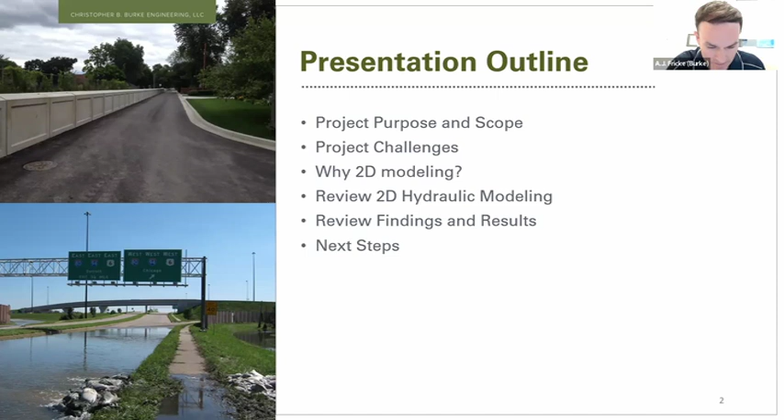So the purpose of our project is to estimate the water surface elevations along Little Calumet River during various flood events using updated data and two-dimensional or 2D modeling. We're going to look at a range of different events, see what water surface elevations those produce, and then evaluate the levee system freeboard or height, comparing those water surface elevations to the top or crest of the levee to make sure that those flood events are contained within the levee.

Our scope of work includes several items, but three main things here that I want to point out. The first was collecting and processing survey data for 30 plus miles of levee. That is done. We previously presented a presentation on that. So we have the levee crest elevations throughout the system. We also did some supplemental surveying to support our hydraulic analysis as well.

We are in the process of wrapping up our detailed 2D model of Little Calumet River. That's really the heart of what we're doing. And then again, performing those freeboard evaluations to compare the water surface elevations to the levee crest elevations.

So why is this important? I think Chairman Baker said it best in the beginning, right? This is a $275 million man-made flood control project. We want to make sure that the events of September 2008 don't happen again. So we know that the levee system protects many assets in the community along the river. So we want to identify any potential problems that may be corrected based on the data that we find out.

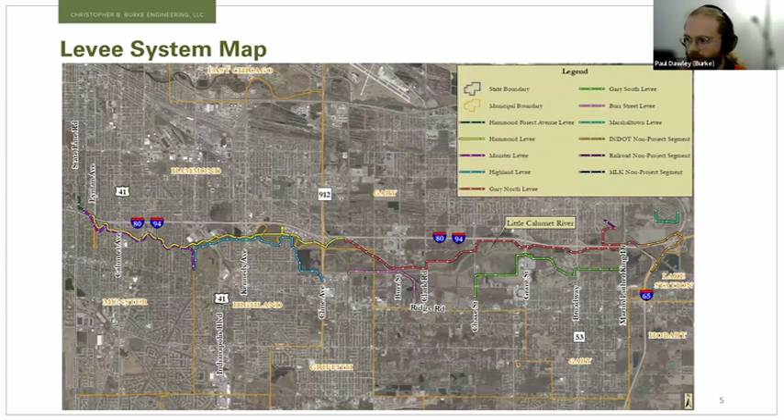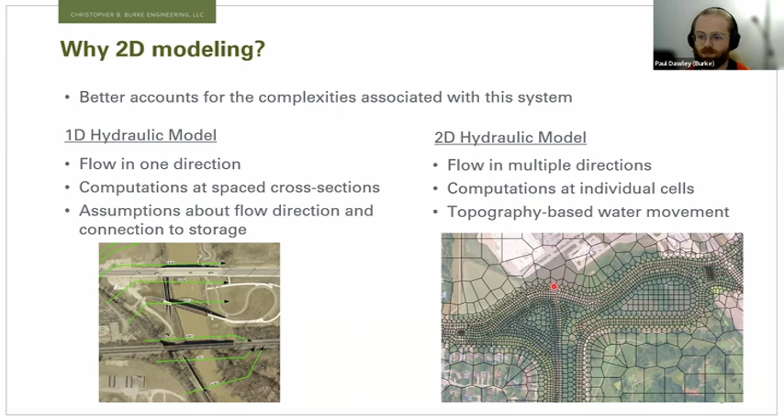Coming from Hart into Little Calumet.

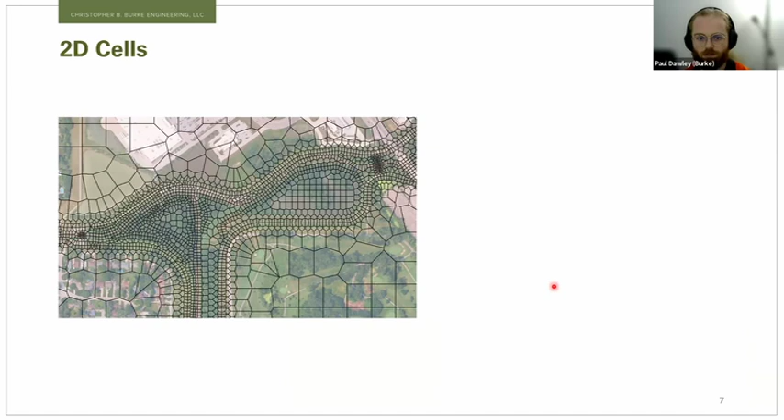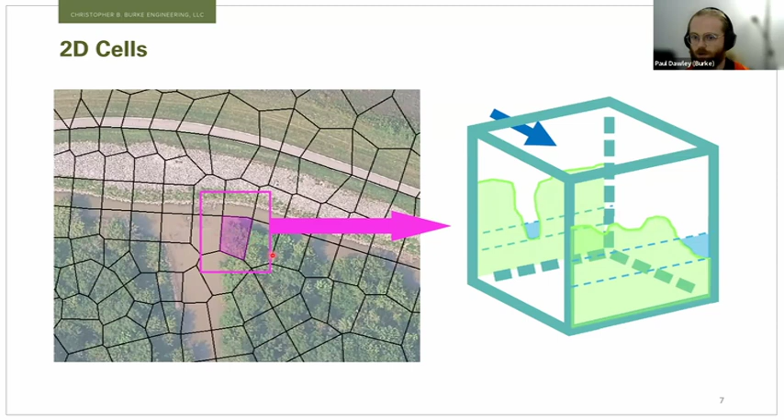So to go a little bit more into how the two-dimensional cells work for these computations, we'll just zoom in on this area here. I have a cell highlighted in pink. Basically, the cell is like a cube, if you will, with each of the edges showing the cross-sectional terrain based on the topography. And then, based on that, it creates a volume elevation relationship. So if there's a certain volume of water within the cell, then it will show a certain water surface elevation, again, based on the underlying topography.

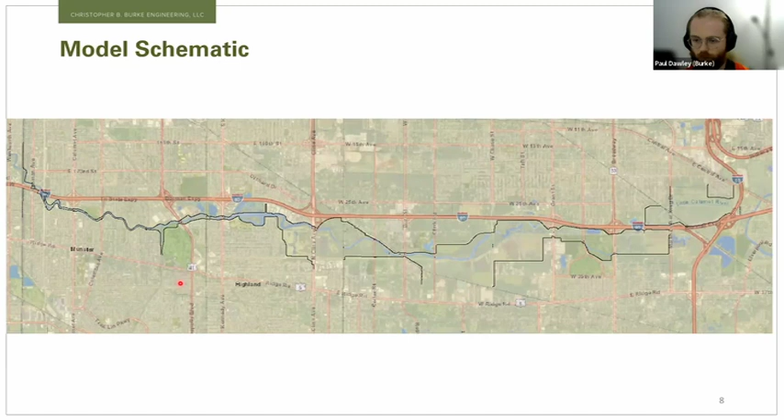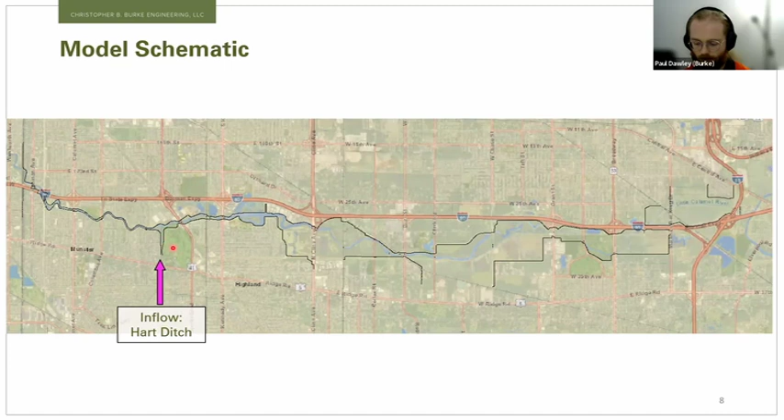So just to walk through a little bit of what AJ was describing as far as how this system works, especially as it relates to how we modeled it. Here we have the primary inflow to the Little Calumet River, which comes from Hart Ditch. It flows north until it reaches the confluence with the Little Calumet River here, which then splits the flow into an east and west reach. In our model, the west reach flows to the Illinois state line over to the west.

And to the east, it flows down to the confluence with Deep River, where we included both the inflow and outflow from a portion of Deep River here in order to account for and capture the backwater effects that it has on the Little Calumet River, which can affect the water surface elevations along the Little Cal.

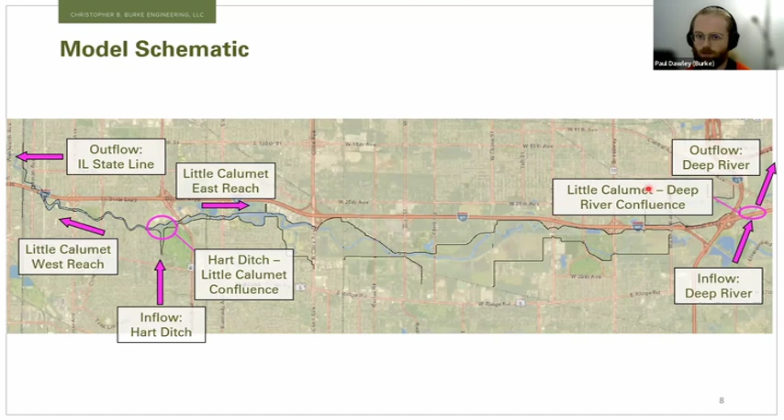So here I'm going to show a graphic animation of the 100-year storm event developing in the west and east reaches. I want to call attention to along the east reach here, you'll see some of these storage areas as the 100-year storm develops, filling in and taking some of that water that had been flowing as it gets out of the channel and into the overbanks.

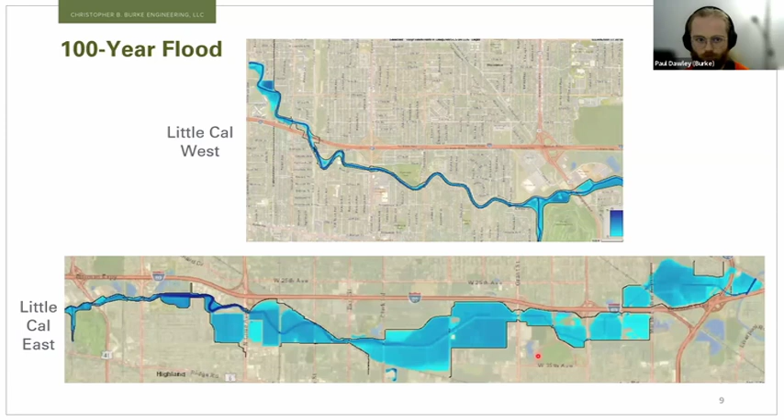This is the confluence with Hart Ditch coming from the south here, and then the split east and west into the Little Cal. So you can see that not only does it split at the channel here, but we also have a little bit of overflow in the overbanks here. I know I've talked to Mr. Repay about this overflow channel to the east here, which you can see a somewhat substantial amount of flow coming through this way.

So I have a quick question, if I may. Yep. Can you determine the volume of water? What percentage of it coming down Hart's Ditch goes west versus going east? Yes, we can. I can talk a little bit about that a bit later. Okay. But that is something that was important for us in calibrating the model. So calibrating to observed data from gauges along Little Cal and Hart, but also comparing to other conditions like FEMA. Thank you.

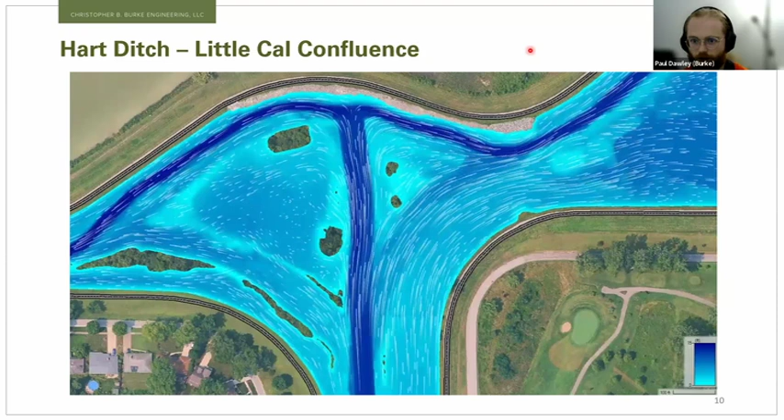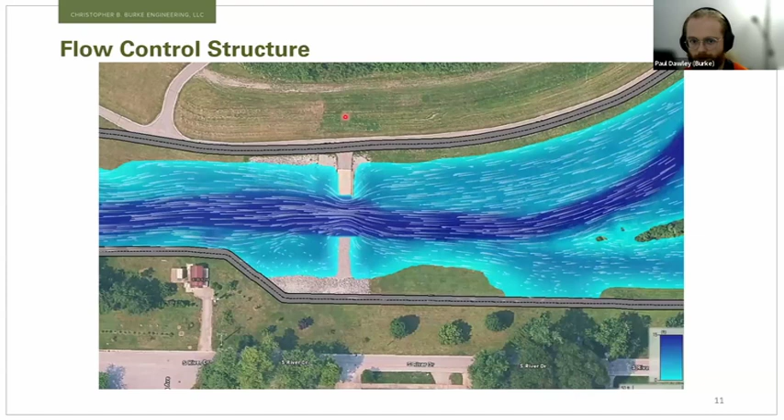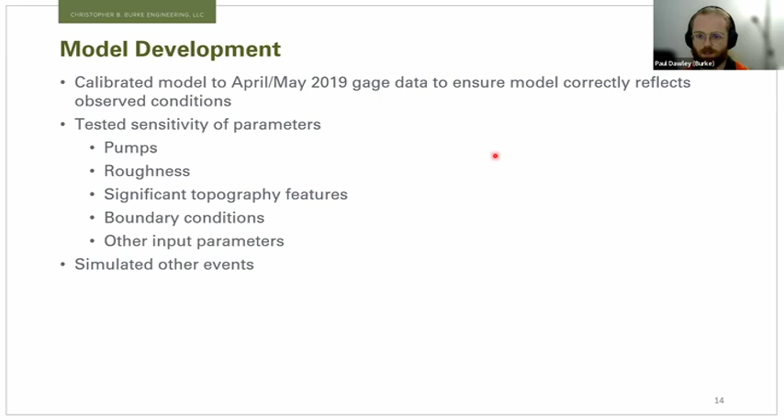We had stage hydrographs set as the boundary conditions based on data from the Corps of Engineers model. And then some other input parameters were tested as well. We also simulated some other events, and we'll continue to expand out which events we've simulated as we move forward. But some of the ones that we have currently done is an analysis of the 100-year storm event, which is what I had showed some of the animations from.

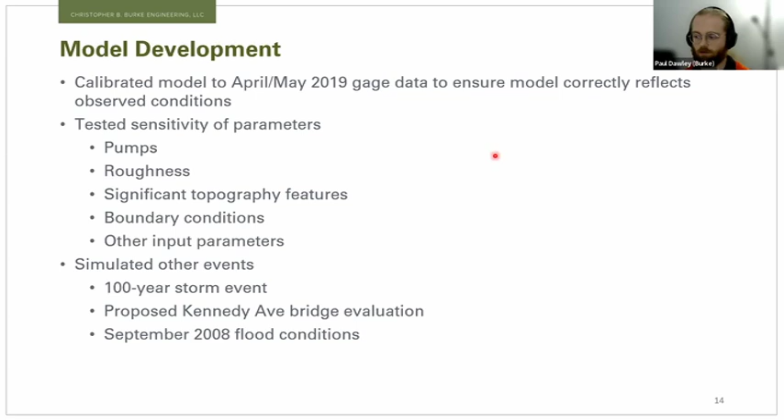The proposed Kennedy Avenue bridge, we've evaluated that at the 100-year storm event as well. And then we also took a look at the September 2008 flood conditions, assuming the current existing levee system topography is in place. And AJ will answer some of those Corps considerations and questions in a second here.

As far as project challenges go, this is a very large and highly complex model. We had about 16 miles of river and 28 miles of levee within the model, as well as 34 bridges and culverts and 82,000 computational cells. So again, think about those cells have a bunch of faces that are basically like cross sections. So compare maybe a few hundred cross sections in a one-dimensional model to 82,000 plus in the two-dimensional model.

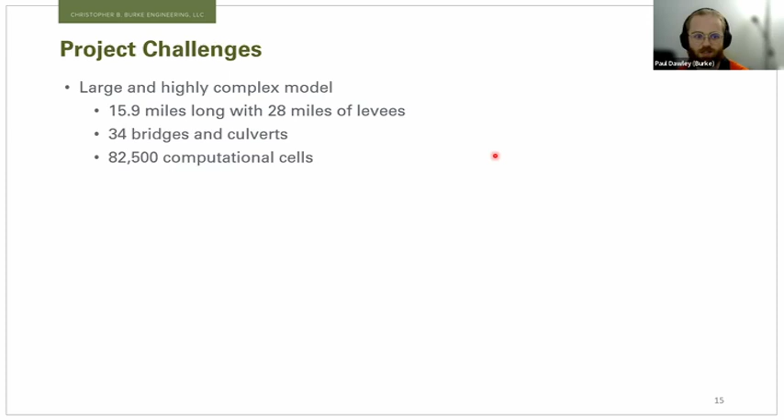We had a lot of data collection that went into this, including developing the two-dimensional mesh to represent the real topography based on some survey data, data that was present in the Corps model. Also putting in a lot of the bridges and culverts based on either the Corps model or existing plans.

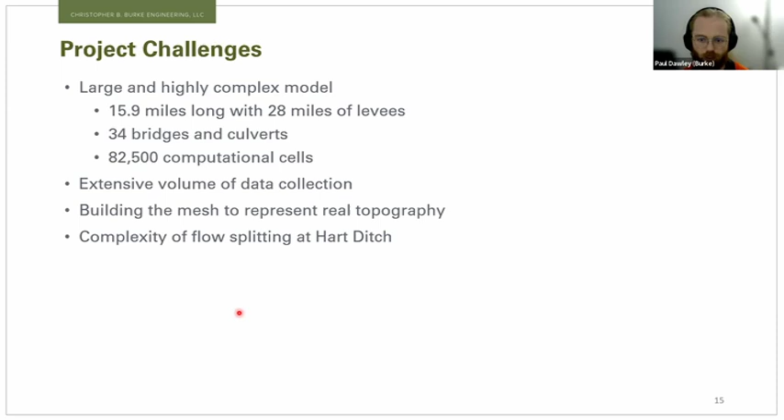There's obviously some complexity of the flow splitting at Hart Ditch. I showed that animation earlier, but it's a very unique system there. I think the two-dimensional modeling helps capture some of the complexity there better than what the one-dimensional modeling can do.

A challenge that we ran into is that there are actually only 2 stream gauges that monitor discharge. So there's one at Hohman, which is on the west reach of Little Cal, and then there's one at Hart Ditch. Unfortunately, there aren't any gauges that monitor discharge on the east branch, so that made calibration a bit of a challenge.

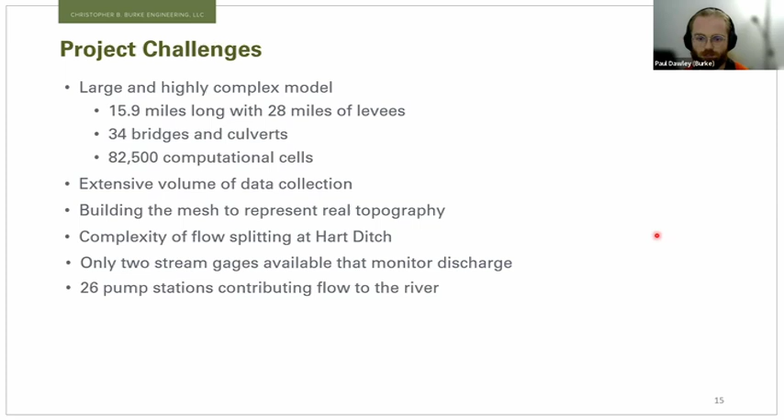Another thing to consider, we had 26 pump stations contributing flow to the river from interior drainage, and we had to make some assumptions as far as the magnitude and timing of how those contribute. Also, as we saw, the significant backwater impacts from Deep River make this system very unique and make it important to include Deep River in the model itself. And we walk through looking at the impact of some of the storage areas and volume in the East Reach.

We also are trying to build this model for the future for meeting certain FEMA requirements. So there's also consideration given to meeting those as well. So I'm going to hand it back to AJ to go through some of those core questions.

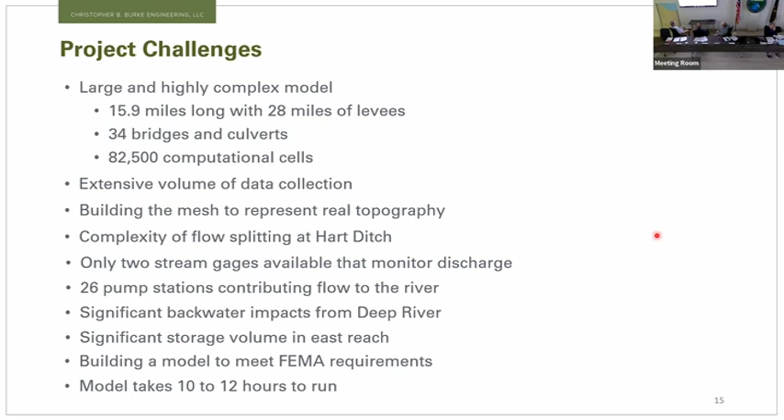Oh, and there's a little bonus for you. Model takes 10 to 12 hours to run on a good fast computer. So just to give you a sense of perspective on how long it takes. We'd run them overnight a lot.

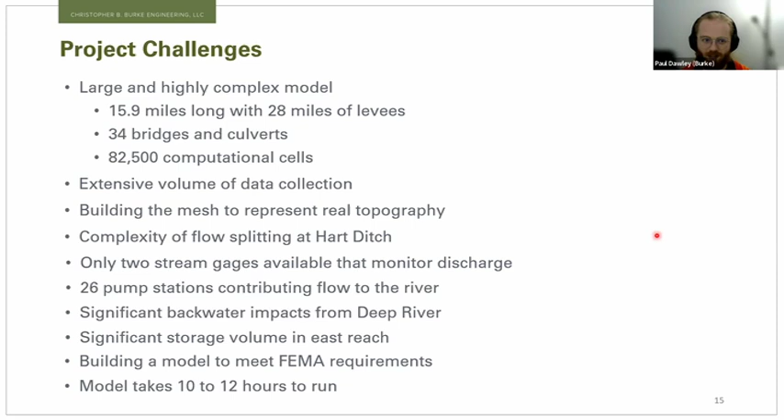All right. Thanks, Paul. Appreciate that great overview of our project. So I want to get back to answering some of the questions we posed at the beginning of our presentation. And question number 1 was, would the levees contain the river if the 2008 flood happened again? So that answer is yes. The flood should be contained within the levees, but do have a little bit of a caveat here. Fine print down at the bottom. That is subject to road closures being properly installed.

And when we look at our model, there's 3 in particular that stick out. Northcote, Kennedy, and Grant are probably the most consequential in terms of needing to be activated first. We did also note that the past projects that the Basin Commission has taken to eliminate closures at 35th Street and Georgia Street in Gary have definitely had a positive impact, because those would be consequential in a flood equal in magnitude to 2008. So if a flood like that happens again, you're not going to have a manually operated closure at those locations.

Also, we want to make sure that pump stations are operating properly to discharge interior runoff, and that backflow prevention is functioning properly to help prevent interior flooding. So there may be a riverine flooding event that's going on the river, but on the protected side of the levee, it might be raining. It's important to make sure that that runoff gets discharged safely to the river. And finally, no major blockage at bridges and culverts. That's really important to keep all the bridge openings, culvert openings free and clear so it can pass the floodwaters.

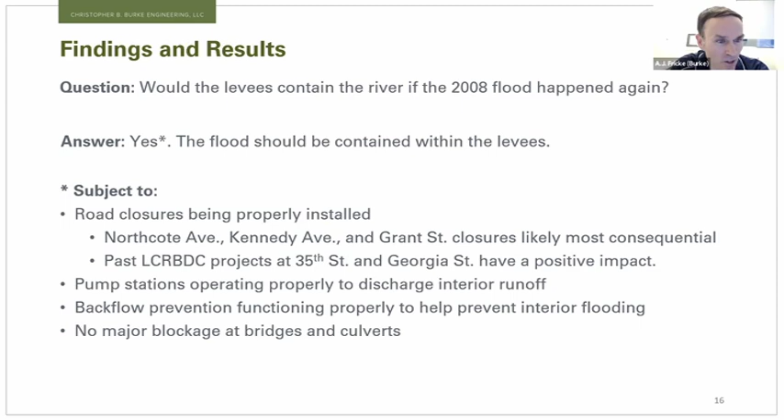All right, our next question was, is the levee tall enough to meet FEMA requirements? And I'll focus on this graphic here and explain what freeboard exactly means. So when we're talking about freeboard, that is the difference in elevation between the flood elevation and the levee crest. So it's essentially that top portion of the levee that's kind of a factor of safety, gives you a little bit of extra height. We typically want to see that in the 3.5 to 4.5 foot range to meet FEMA requirements. If you go look at the Code of Federal Regulations, the freeboard is somewhere in that range above the

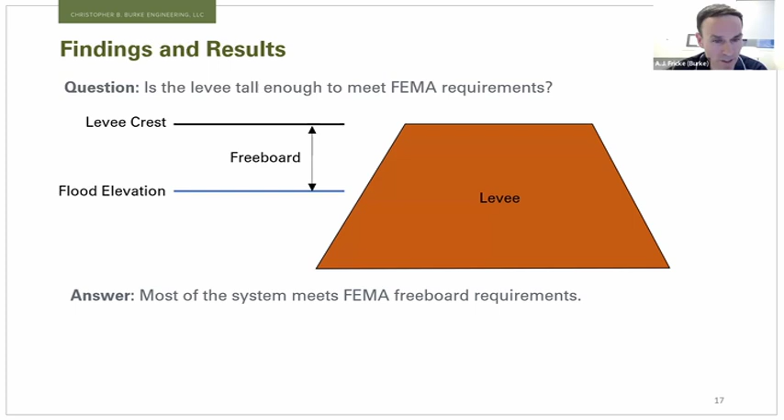100-year flood elevation. So the answer to this question is that based on our model results, most of the system meets freeboard requirements for FEMA, but there are a few clarifications yet again. Did want to point out that the 100-year flood, the regulatory flood, is contained within the levees, and there is freeboard. So that means that the water's not getting up to the levee crest. It's not lapping at the top. There's distance between that flood elevation and the levee crest.

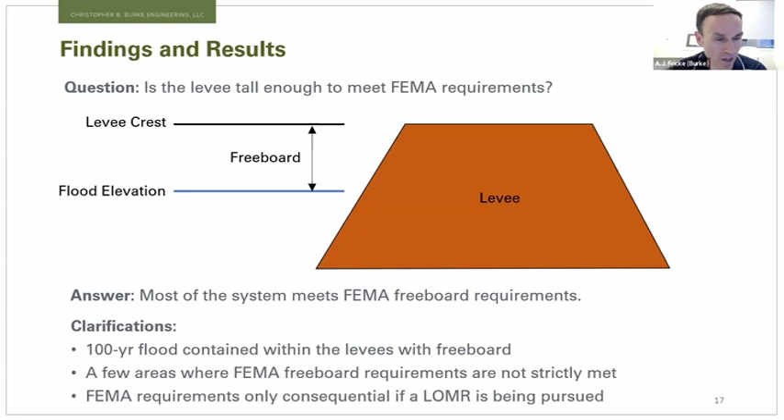Although there is some freeboard, there are a few spots where the FEMA freeboard requirement isn't strictly met. And when we really boil down to it, those FEMA requirements are really only consequential if a LOMR is being pursued. So we know that we have a levee system that is built to withstand a certain level of flooding. It wasn't necessarily designed to meet all the FEMA requirements, but we can safely say that it does have freeboard over the 100-year flood along its entire length.

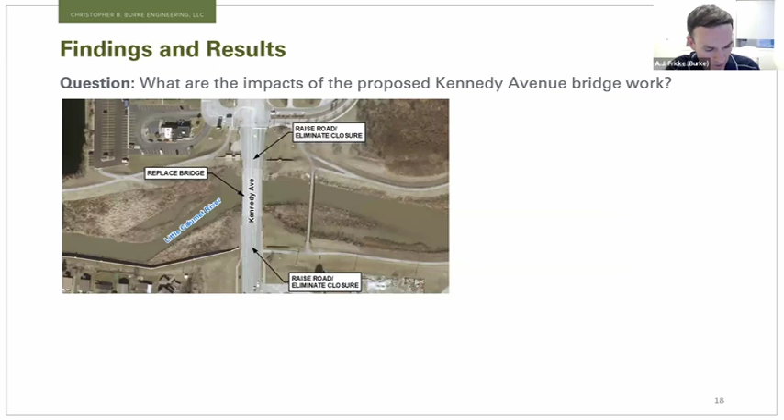So the answer to that is what we found in our hydraulic model was that the new bridge really doesn't have a huge impact on the 100-year flood event in terms of the water surface elevation. We're still running the 200-year event to see what that looks like. We know that there's perhaps a larger opening there, fewer or no piers, so there probably is some benefit. But the main thing is that there's a significant reduction of flood risk by eliminating those manually operated road closures.

So just like we saw with 35th Street and Georgia Street in Gary, if the 2008 flood would happen to come again, those are good to go, right? Because there's no temporary closures there. That's going to be a huge benefit to everyone if that's the same situation here at Kennedy.

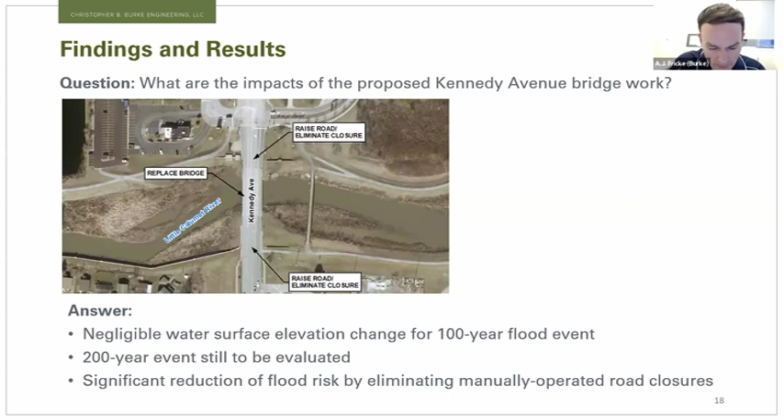So one more slide here before we wrap up and open it up to questions. Just want to review what is left as the next steps. On our current assignment with you, we want to, of course, incorporate any feedback that we receive from you during the meeting this evening or otherwise. And then we will make some final refinements to the model inputs and fine-tune things, run some of those additional storm events that we haven't run yet, finalize our calculations on the levee height or freeboard, and then we'll be delivering a final documentation report to you that summarizes all of our findings.

We did identify a few things for potential future improvements that may be beyond this project. If we want to improve this model in the future, we would want to obtain some additional improved surveying data or bathymetry, and that means what are the elevations of the river below the water surface, right? What lies beneath? We know that you do dredging projects, and that is very beneficial to keeping the river conveyance what it needs to be. But we know that rivers are dynamic systems, things change over time, and it's good to keep on top of what the river is.

And then also full integration of the interior drainage. Paul mentioned some pump stations. There's 26 throughout the system, and the timing of those, when they turn on, when they turn off, can have an impact on how things work along the river. So that just is another layer of complexity. We've made our best assumptions at this point, but that would be a way that the model could be further refined.

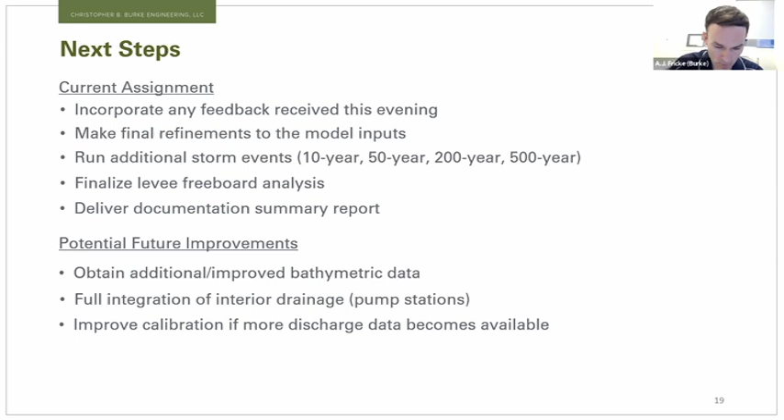So we've reached the end of the presentation here. That was our crash course in the model, and we would be glad to answer any questions that you may have. Very good. Wow, that's impressive. That was outstanding.

So appreciate that, folks. As far as additional modeling requests, how are we doing the maintenance of this and managing it? One of the discussions that we've had here over the last six months or so had to do with the event where 9 inches of rain fell along the Lake Michigan shoreline. And what would happen if that 9 inches of rain fell directly on the Borman Expressway, and what impact would that have? How are you handling it from a business perspective, if we give you that request?

Yeah, Chairman Baker, thank you for that question. That's a good question. And as I mentioned earlier in the presentation, we definitely want this model to be useful to you moving forward to evaluate new projects or new situations like that. That specific situation, we'd probably have to give some thought to, but we might have to augment the model a little bit to develop a discharge that would be associated with that and then plug that into the model. I'll maybe ask Paul and Sivash and Peggy if they have any thoughts too on what that might entail.